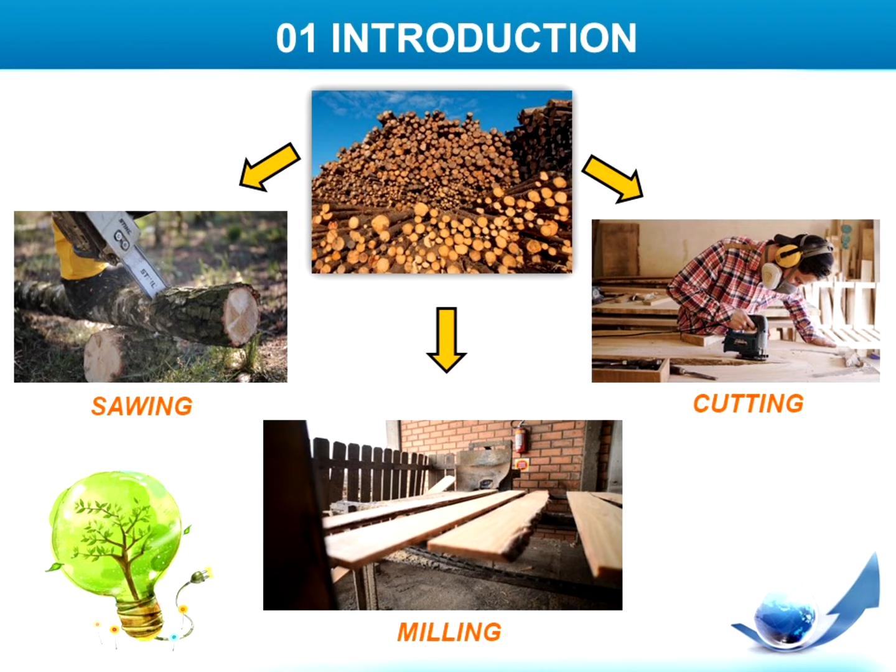Conventionally, wood sawdust is widely used in medium-density fiberboard (MDF), furniture, solid fuel for heat boilers, and some eventually goes to landfill for disposal. However, those applications and efforts are still insufficient to cater to the huge amount of wood sawdust generated every year. So, instead of dumping the remaining wood sawdust into landfill, why not sustainably transform it into a green ceramic product?

In fact, this is also well aligned with and supporting the UN Sustainable Development Goal, SDG Goal number 12, Responsible Consumption and Production. Therefore, this invention has successfully recycled wood sawdust waste as one of the raw materials for green porous ceramic thermal insulator, also known as green PCTI.

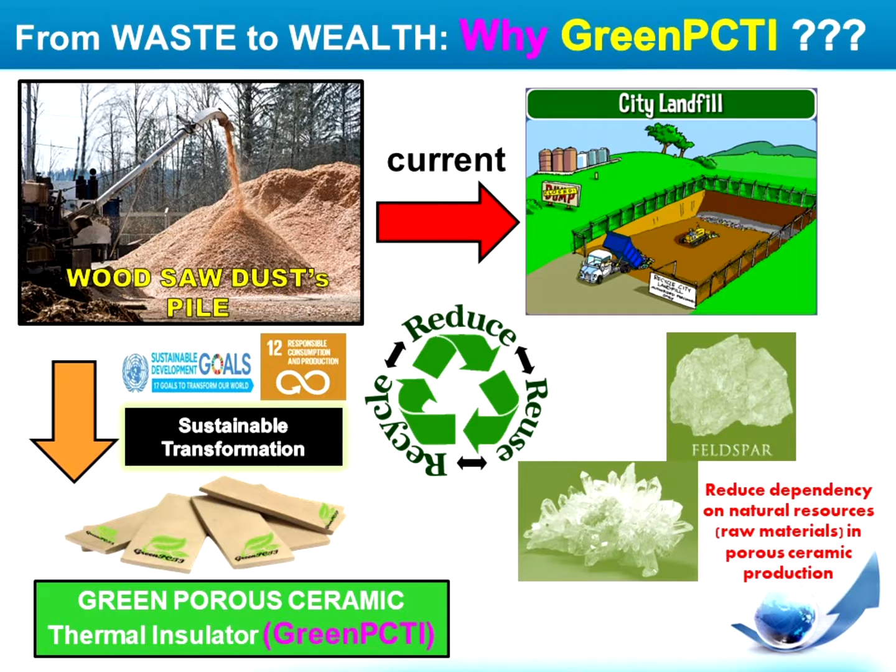Ladies and gentlemen, why wood sawdust? What is the function of wood sawdust in porous ceramic production? The wood sawdust acts as a pore-forming agent to induce the formation of a well-controlled level of internal porosity in the porous ceramic. Subsequently, the pores reduce the thermal conductivity of the ceramic, contributing to the thermal insulating properties.

Currently, solid wastes such as wheat straw, corn cobs, maize seed, wheat seed and rice husk ash are used as pore-forming agents. However, those wastes have inconsistent particle size distributions, leading to inconsistent porosity, mechanical strength and eventually inconsistent thermal insulating property. Furthermore, the wastes also have a high ignition point, leading to energy inefficiency in production.

Therefore, in this invention, wood sawdust has great potential as a pore-forming agent for the ceramic thermal insulator because the dust has a fine and uniform particle size distribution ranging from 1.5 to 63 micrometers. In addition, wood sawdust also has a much lower ignition point of approximately 118 degrees Celsius. Hence, a much lower firing temperature is applied to ignite the dust and form pores. Subsequently, this can reduce embodied energy as well as the carbon footprint for the production of porous thermal insulator.

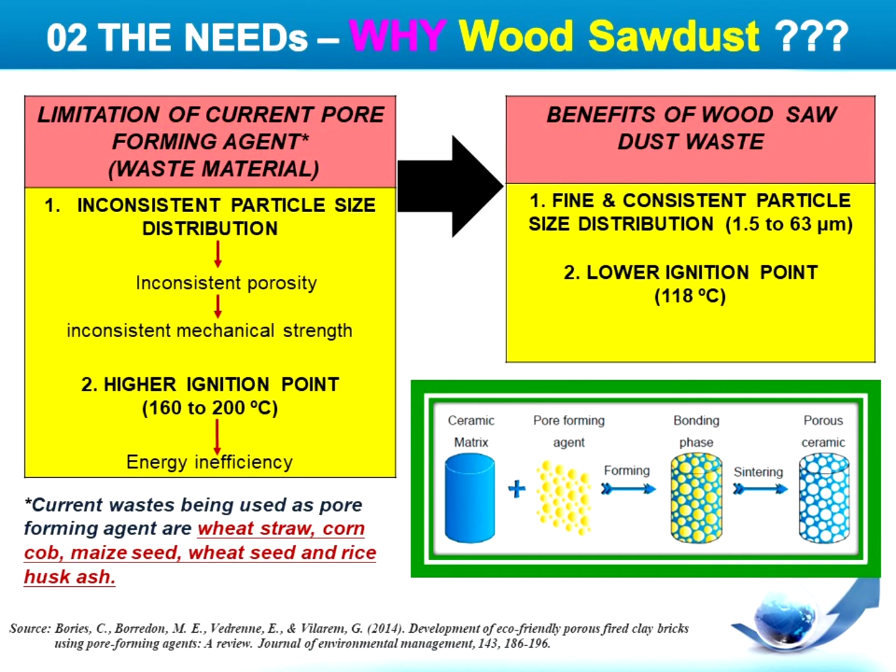Now, the next question is, why do we essentially require the porous ceramic thermal insulator? Where do we use it? And why do we prefer the eco-friendly thermal insulator? Looking at the market demand, thermal insulators are mostly used in the refractory ceramic, building and construction industries. The thermal insulator market is projected to grow as much as 5.3% in year 2026.

Also, consumers are currently progressively opting for eco-friendly and sustainable materials by recycling and incorporating waste materials into them. In this case, the porous ceramic thermal insulator incorporated with wood sawdust waste is an excellent option. Therefore, this invention came at the right place and right moment to cater to industry demand.

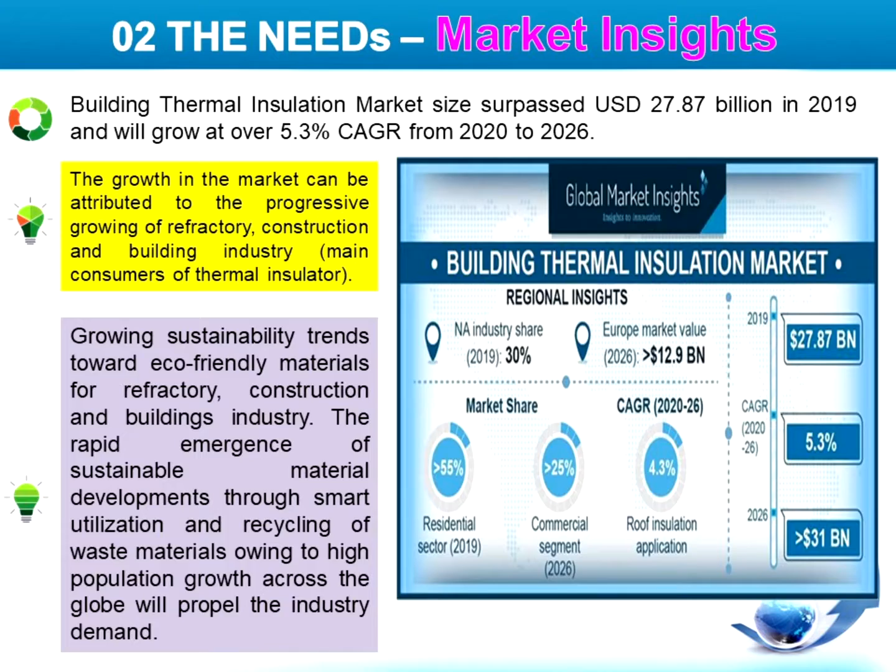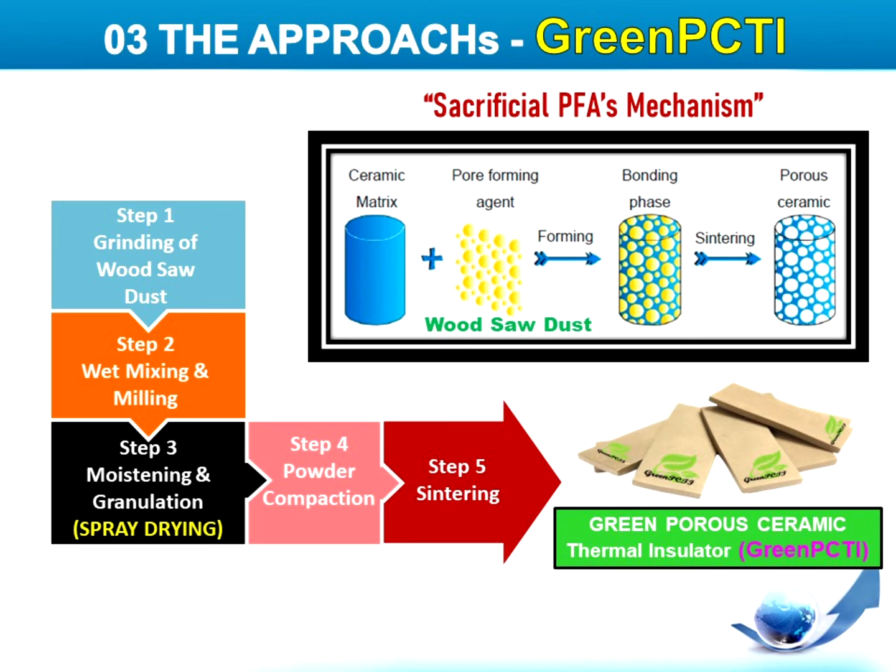Ladies and gentlemen, this is the processing route to produce the porous ceramic thermal insulator. We are employing the simple powder compaction method integrated with a spray drying process. This process is similar to what has been practiced by the worldwide ceramic industry. So this is how the porous ceramic thermal insulator looks.

This is the summary of the successful journey of the invention. We have named the product Green PCTI. Overall, we are now at the stage of TRL4. With collaborative work with ADTEC Taiping, we have successfully developed the small-scale porous ceramic thermal insulator at laboratory scale. Subsequently, we will be proceeding to TRL5 and above for a large-scale prototype and testing the Green PCTI in simulated and actual applications.

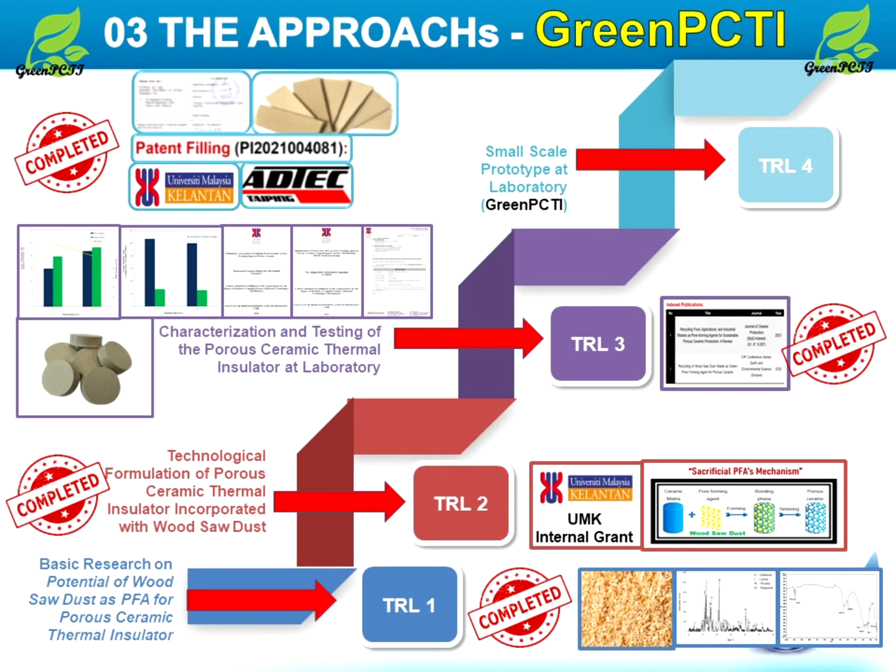On top of these successful inventions, we would like to precisely highlight and emphasize that the novelty and uniqueness of these inventions are based on three criteria. Number 1, thermal insulation. The Green PCTI has a well-controlled porosity level, leading to its consistent and lower thermal conductivity of as low as 0.06 watts per meter Kelvin.

Number 2, porosity and non-hazardous. The Green PCTI has a porosity level of 40 to 45%, comparable with the commercial ceramic-based thermal insulator. It has passed leaching tests and is non-hazardous despite being made from wood sawdust waste. Last but not least, number 3, the Green PCTI is environmentally friendly. It consumes lower embodied energy during production since a lower firing temperature is employed, and it is recyclable.

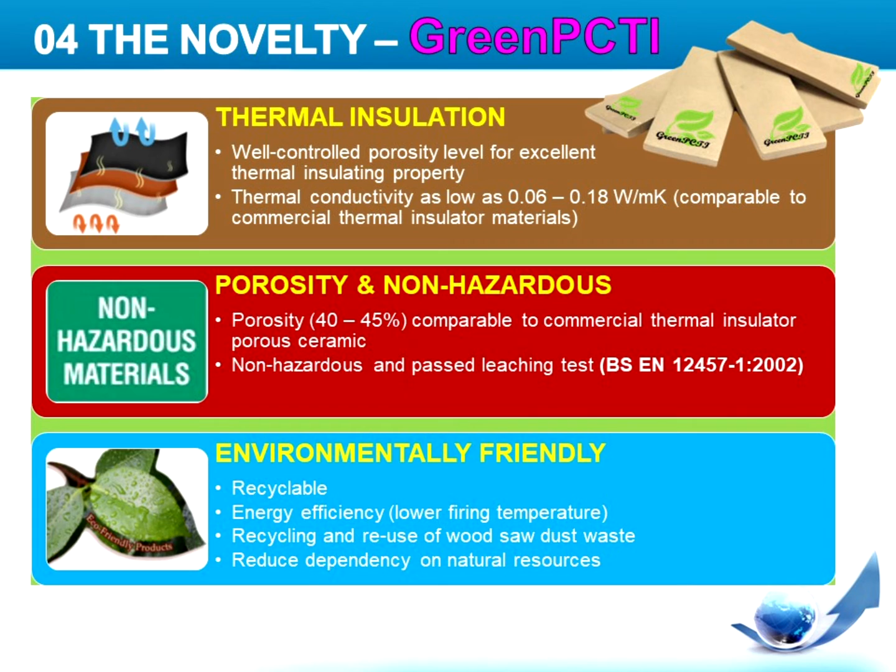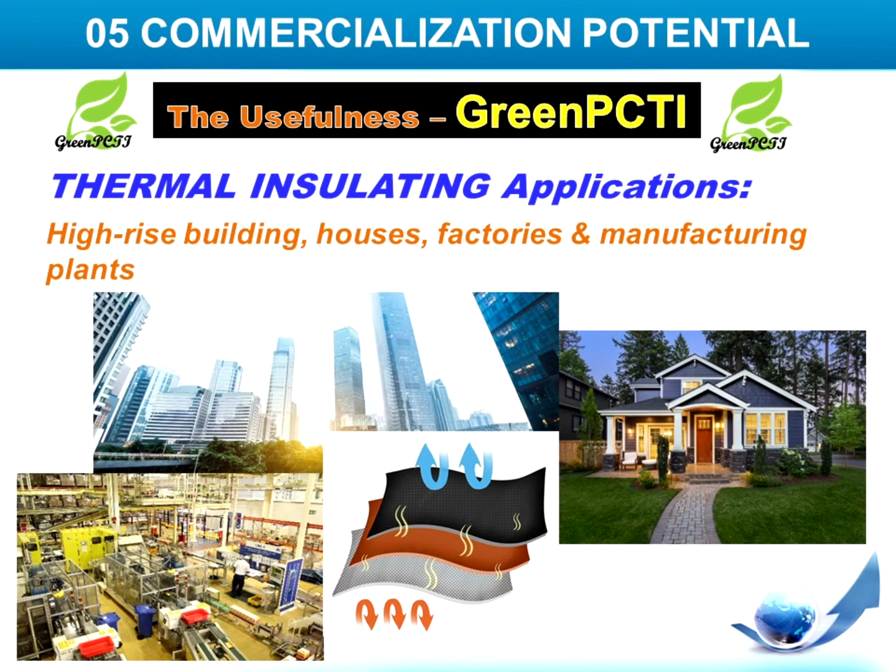Ladies and gentlemen, considering the novelty and uniqueness of the Green PCTI, where can we use it? The Green PCTI can be used specifically for thermal insulating purposes such as roof shielding and wall shielding in high-rise buildings, houses and factories.

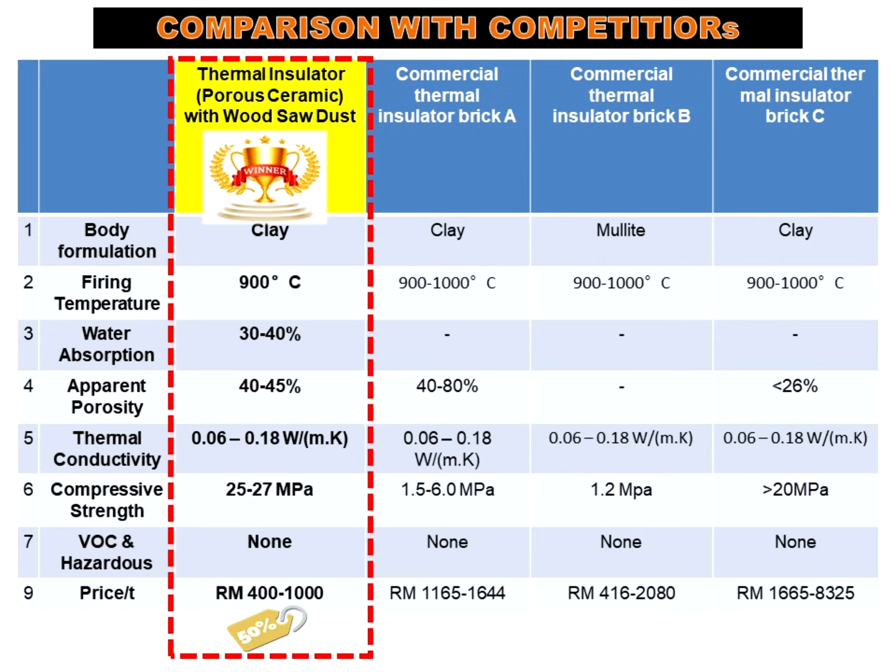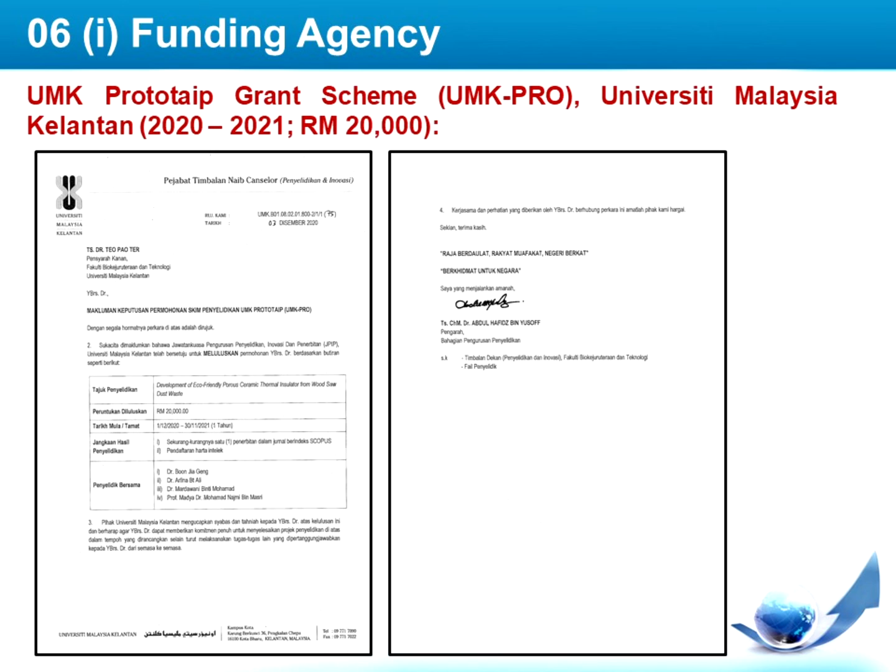Overall, it is also among the cheapest, as the pore forming agent is a waste material, which is the wood sawdust waste. On top of everything, we would like to convey our heartfelt gratitude to Universiti Malaysia Kelantan for awarding the UMK Prototype Grant for the development of the Green PCTI.

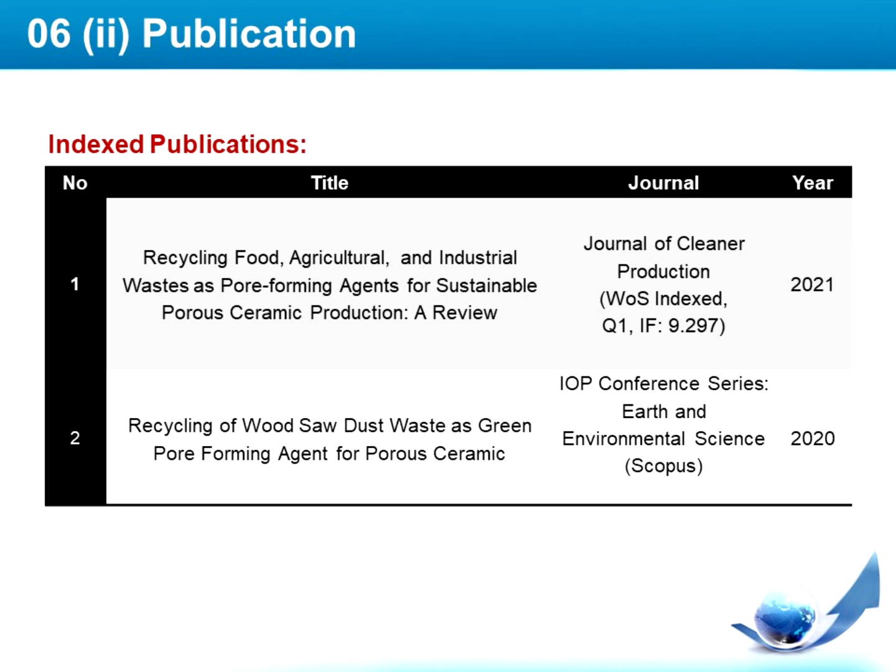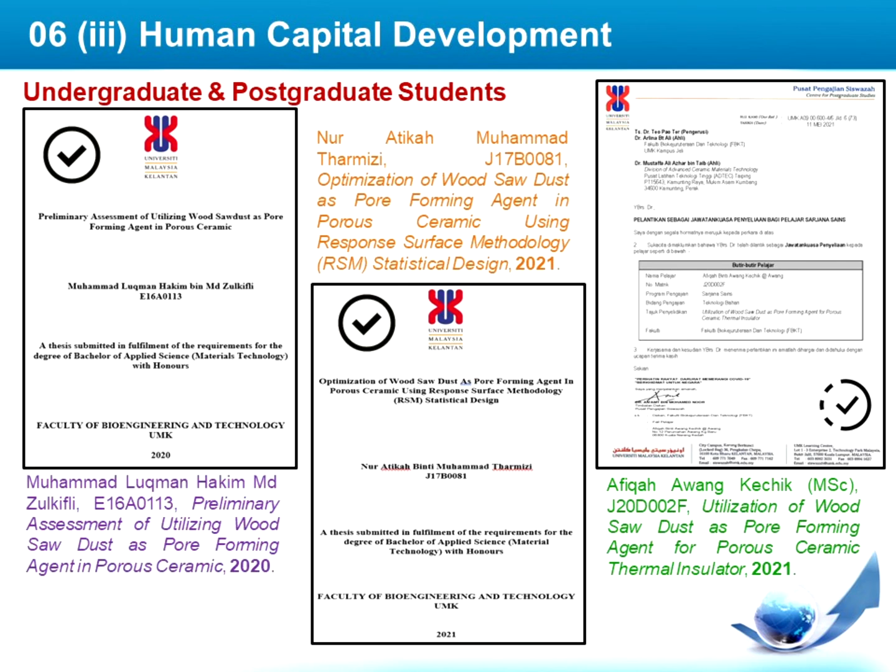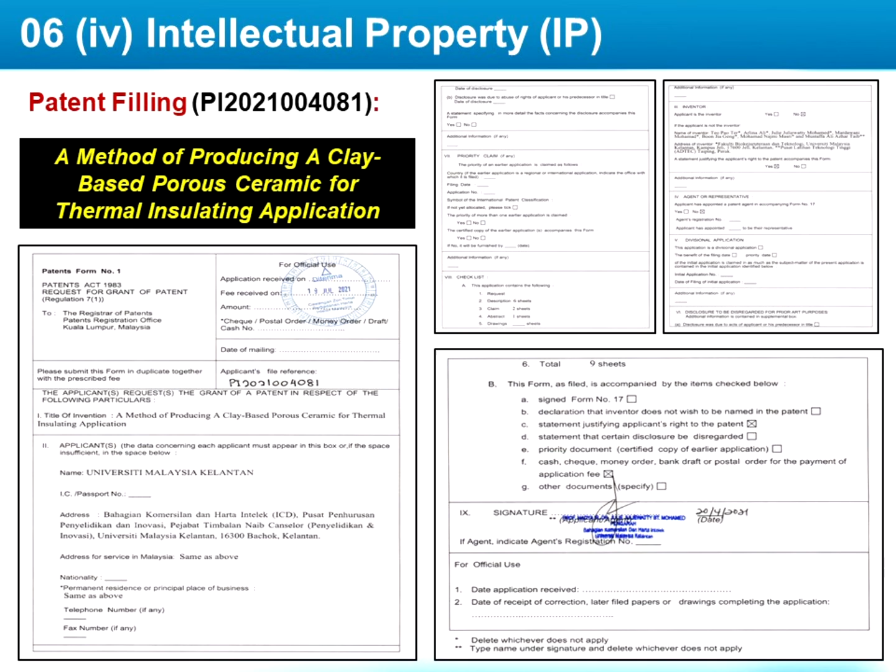Along the invention journey, we have successfully published 2 Web of Science WOS Q1 and Scopus indexed journals. And not to forget the 2 final year project undergraduate students, Muhammad Luqman and Nur Atikah, as well as the Master of Science student Afiqah Awang Kechik, who have contributed to the success of the Green PCTI invention. We are also glad to share with you that we have successfully filed the patents of these Green PCTI inventions in July 2021.

We are also working closely with ADTEC Taiping to upgrade and upscale the Green PCTI to the higher level of TRL 5 and above. We are on the road and progressively moving to full product commercialization at TRL 9.

Ladies and gentlemen, to conclude the pitching session, let us look at the overall innovation impacts in terms of the quintuple helix of the Green PCTI inventions. The success of these inventions would reduce waste disposal costs of the wood and timber industry, as well as reduce raw material costs of the thermal insulator industry. It will ensure a more sustainable and greener recycling of the wood sawdust waste and reduce dependency on and exploration of natural resources of raw materials for porous ceramic thermal insulator production. Both of these would benefit the environment.

As for us, UMK academic institutions, it creates new recycling knowledge for us and produces new young talented graduates, as well as strengthening the linkages with other agencies. We are glad with the opportunity to collaborate and share the Green PCTI production technology with ADTEC Taiping.

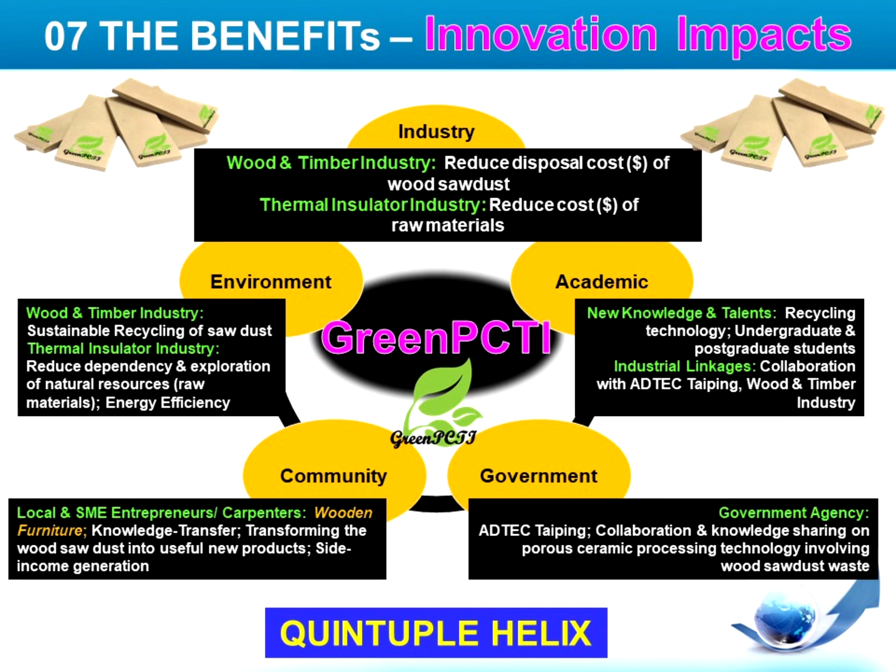Last but not least, I would like to acknowledge and thank all the team members for contributing to the success of the Green PCTI inventions. Without them, the Green PCTI would not be as successful as today.